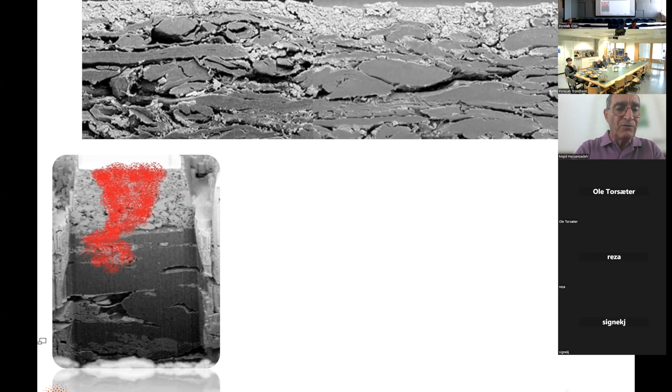Look at this formation cross-section, and you have all these various layers, and penetration of a liquid into that layer. If you can model this, you are actually going to model flow of ink into paper, because this image is not from a geological formation. This is actually from a piece of paper. The image shown on the left is penetration of a dyed ink into paper. So you see that there is a close link between geological porous media and industrial porous media.

So that's what I would like to talk about. I will give some more examples of industrial porous media, talk about similarities and differences with geological media, and what is specific about industrial media. The limitations of traditional modeling mean we cannot really use exactly the same models as in geological porous media for industrial applications, or even the experimental methods - they will need some modification, refinement. So I'll talk about that as well.

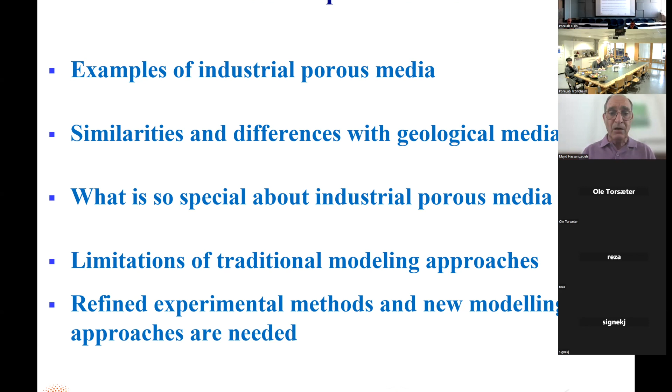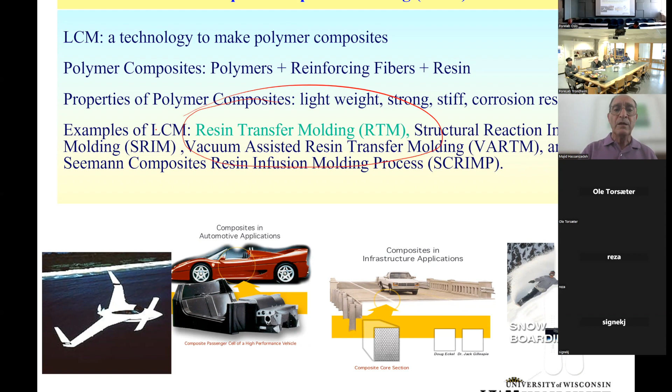One example of industrial porous media is a liquid composite molding system. This is to make composites that are all around us. In the lower part of this slide, you see many examples of things made from composites. There are various ways to make composites. One of them is resin molding, resin transfer molding. Very simply illustrated, it is as follows.

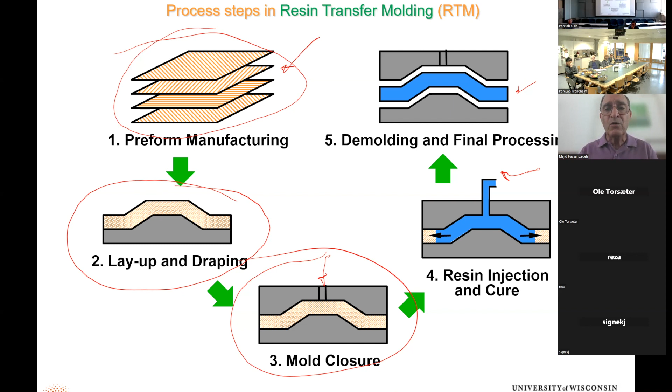You have certain mats - these are synthetic material - and you put them in a form to give them a desired shape, and they close the form. There is an opening where you can inject a liquid resin, and that penetrates the layers of porous material. Once it fills, let it dry, it will cure and harden, becomes the solid composite material you want. Now, this is basically flow of liquid into a dry porous medium, just as happens when dry soil is invaded by water. It's a little more complex because of these layers, and also because there would be heat generation, so you need to look at not only moisture transport, but heat transport.

And this is actually true in many other porous media - you have complex, coupled processes. For example, fuel cells. I guess nowadays everyone knows about fuel cells.

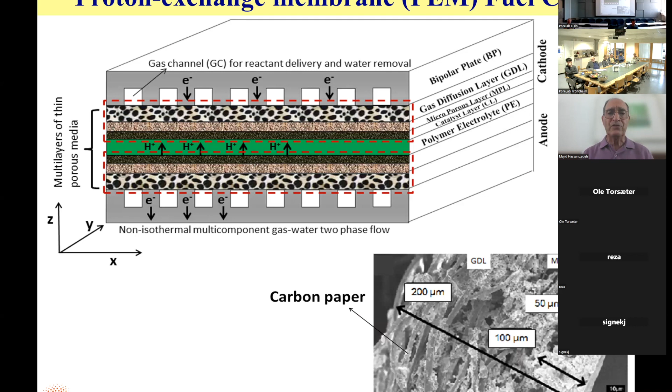As you know, air and hydrogen react, produce energy, but also they produce water, which is the waste. Some parts of this fuel cell must remain moist, but you don't want too much water. So water management is a major issue. You need to know a lot about these porous materials and the modeling and so forth.

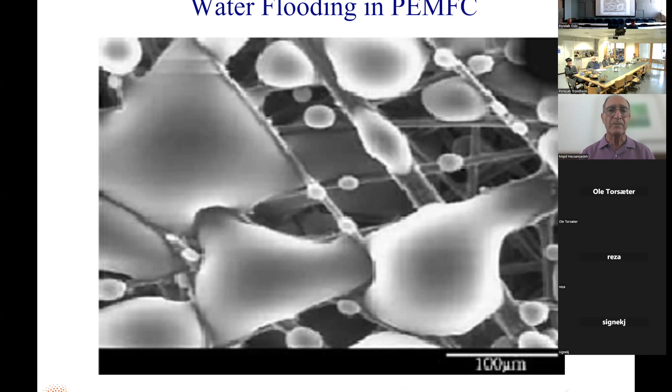In paper production, there are very interesting examples of unsaturated flow in porous media. They make paper from paper pulp, which is basically water with a little bit of solid in it, less than 1% solid weight. This must be turned around so we get paper that's more than 99% solid, with maybe some moisture of less than 1%, because you always have moisture in solids.

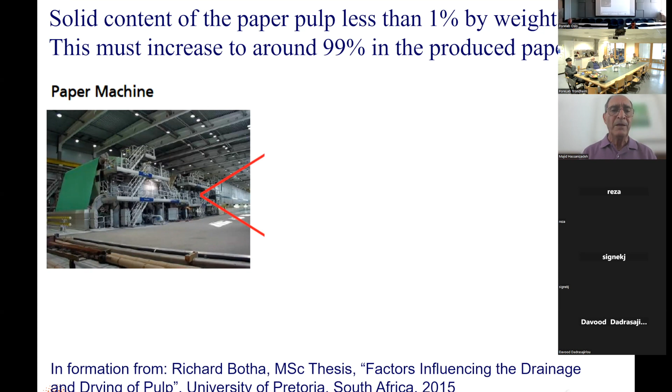This is done in a paper factory, a paper machine, and there are 5 main parts to a paper machine. There is where you make the pulp. Low consistency means it's very, very little solid.

This pulp is taken to a forming section where as much water as possible is removed from it by gravity drainage and by vacuum. That is done in the forming section. A large part of water, something like 75%, can be removed here, but there's still a lot left.

At the end, the paper will be dried completely by drying, and that happens in the drying section. But drying requires a lot of energy, so you want to remove water more than just gravity allows, and that will happen in the pressing section.

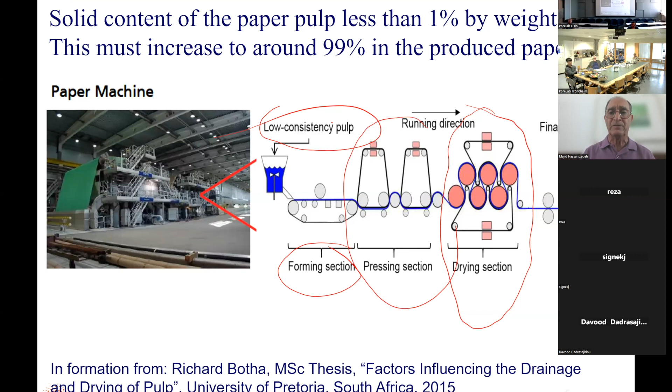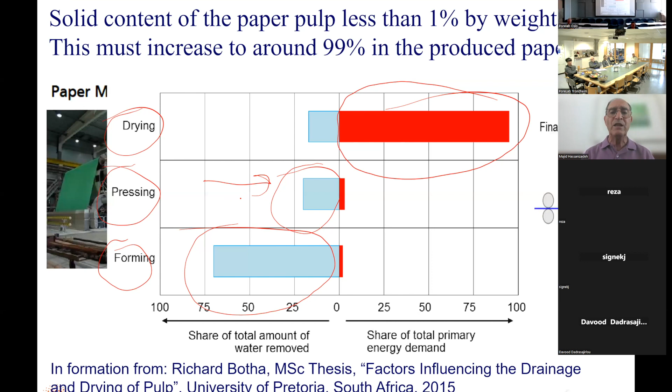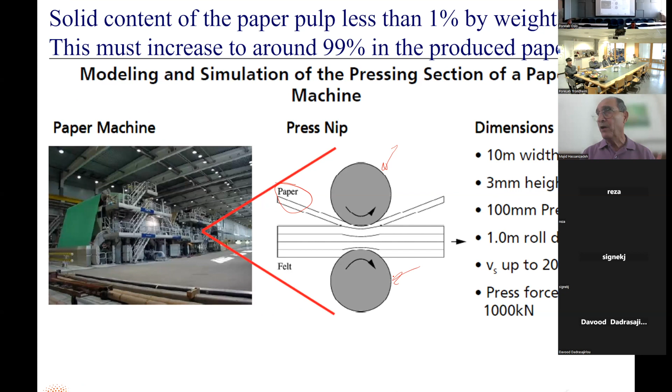This is done in the pressing section by moving the paper pulp, shown here, between two presses, two cylinders. The paper pulp that by now has about 75% water by weight is put on a felt.

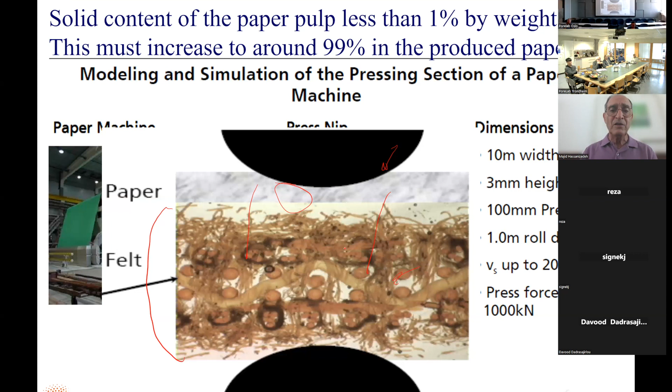This is a piece of clothy material, which is extremely hydrophilic and very dry. By pressing this paper pulp, the moisture is basically pushed and sucked into this felt. That reduces the amount of water to less than 10% by weight, which then has to be removed the rest by drying. So this is another example of unsaturated flow.

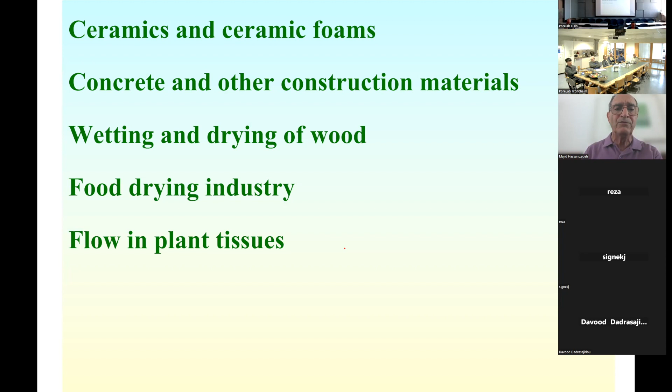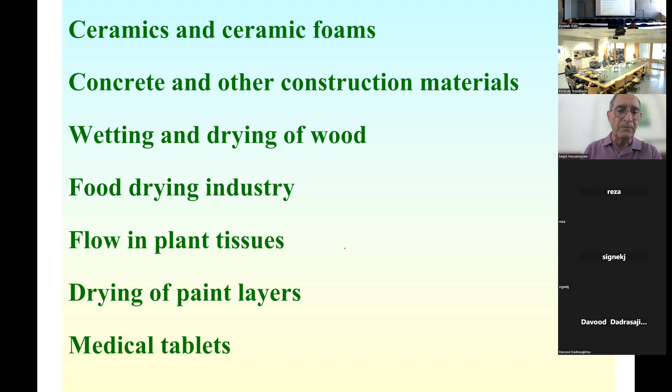There are many examples in ceramics making, construction material, drying and wetting of food, in wood, in food industry, in plant tissues, drying of paint layers, in textile making dresses, and also medical tablets, metal foam.

It just goes on. I would like to give you two more interesting examples, things that we have worked on. One is that study of inkjet printing.

How does ink penetrate into paper during inkjet printing? This is very important in the sense of optimizing the composition of the ink, the attachment to the paper, and reducing the amount of ink and so forth.

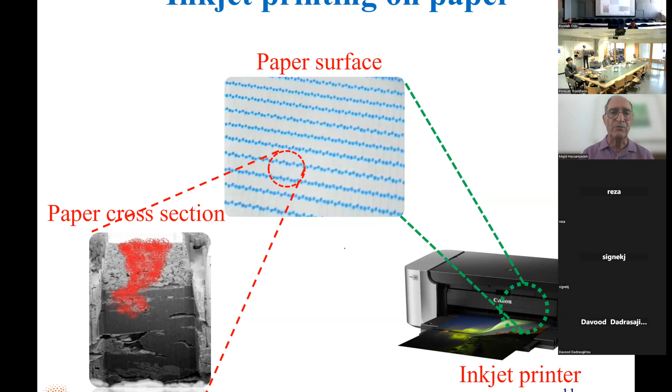So the ink, both paper and ink are complex materials. We have studied the paper. The coated paper has a coating layer and a base layer.

In this example, the base layer is 85 micron thick, but it could be up to a couple hundred micron, and the coating layer is typically 15 to 20 micron thick. There is, of course, coating on the other side as well.

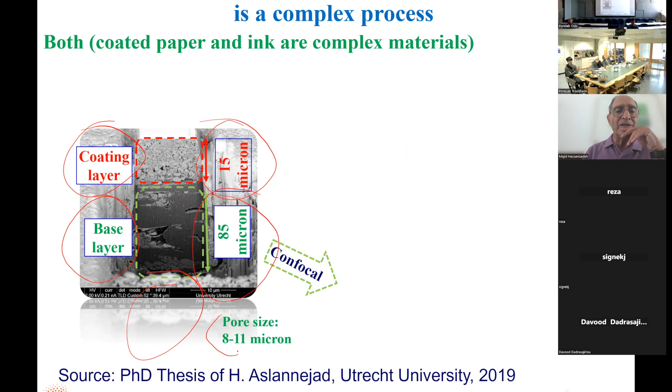This base layer is a fibrous material. It has pore sizes of 8 to 11 micron, and we can therefore use confocal laser microscopy to image that layer. You can also use CT scanning to image it.

Here you see images from confocal laser that we have prepared ourselves. You can see the fibers very nicely, very clearly, their surfaces. And we can also see penetration of ink that has some fluorescent material in it into that paper.

The coating layer, however, has very tiny pore sizes, 100 to 600 nanometer. So we cannot use confocal laser microscopy.

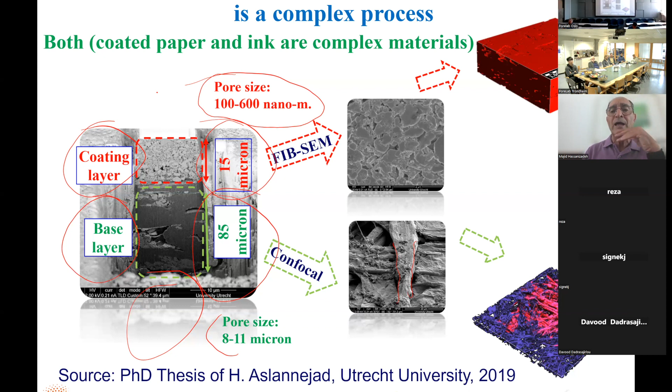Instead, we need to use something like FIB-SEM, focused ion beam combined with scanning electron microscopy. This gives a three-dimensional image of the structure of this coating layer, which we can convert into a digital image for pore-scale modeling. The penetration of a liquid's movement into that fibrous material is very complex.

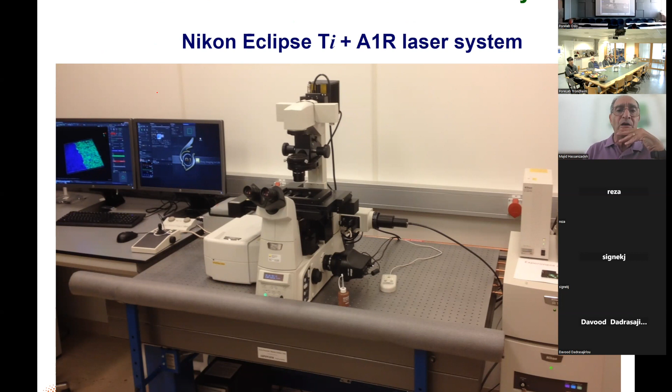Here is a Nikon microscope we have used for imaging, getting images like this. What you see are the green fibers of the fibrous layer, and then we are introducing some fluorescent dye from the right-hand side.

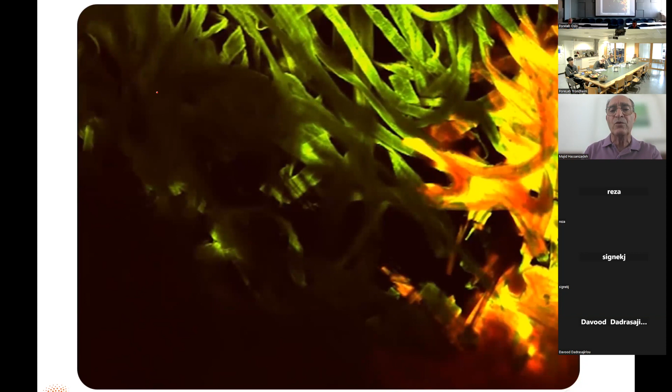What you see is that there are two fronts. The redder the color, the higher the moisture. You can see that the fibers become red, and the space between fibers becomes more saturated afterwards. So it's a sort of two-domain invasion of this ink into the fiber. You can see that here very clearly — there are really two different fronts.

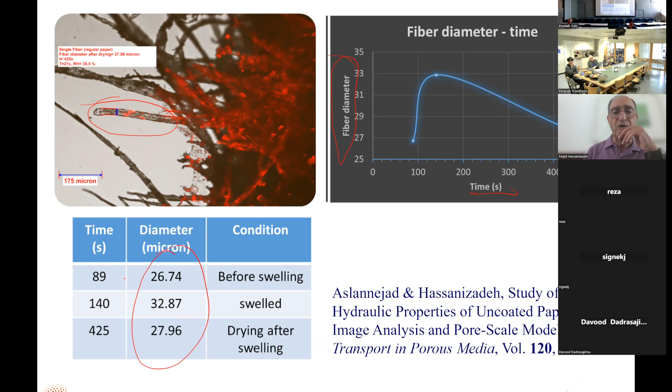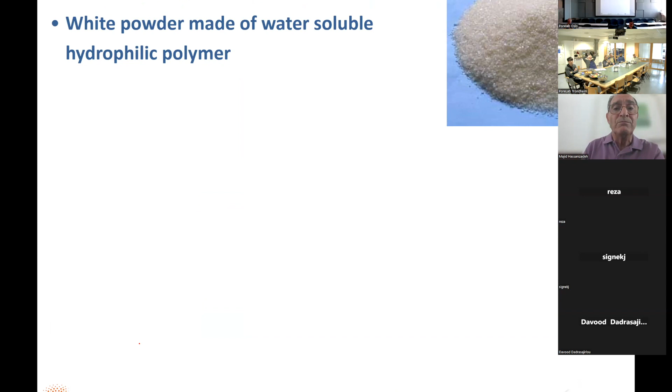Water goes in there in huge amounts — a gram of SAP can absorb up to 1,000 grams of distilled water. Of course, if there are solutes in there, less will be absorbed, and in the case of urine, 1 gram can absorb about 30 grams.

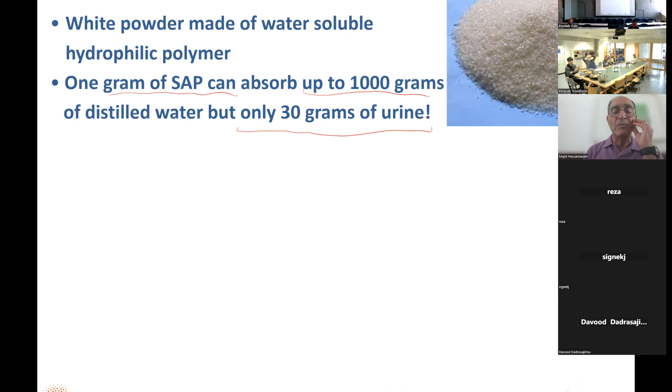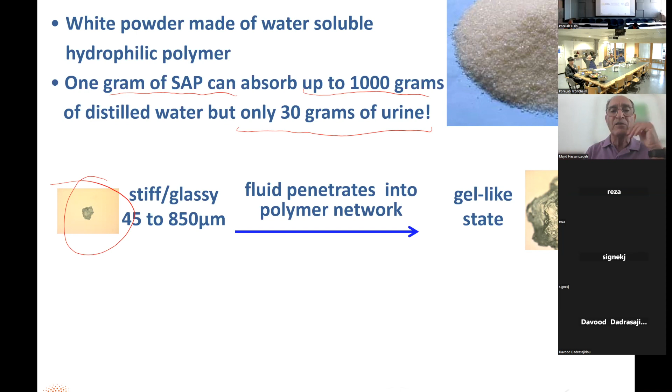These are glassy, stiff particles, a few hundred microns in size. As the fluid enters, it becomes gel-like — basically mostly water once it absorbs so much, but it still holds the shape of a solid material. You see that absorption of water happening here.

We started with particles under the microscope, and this is real time. See, the absorbed water becomes basically transparent.

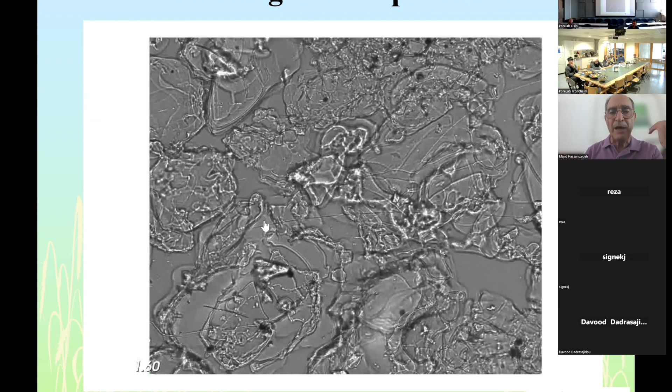You can see that also here — a nice experiment where we have a layer of particles, and you see that happens fast. As the particles absorb water, they grow and fill up the glass, and because they are pushing against each other, they won't come out. We did a similar experiment.

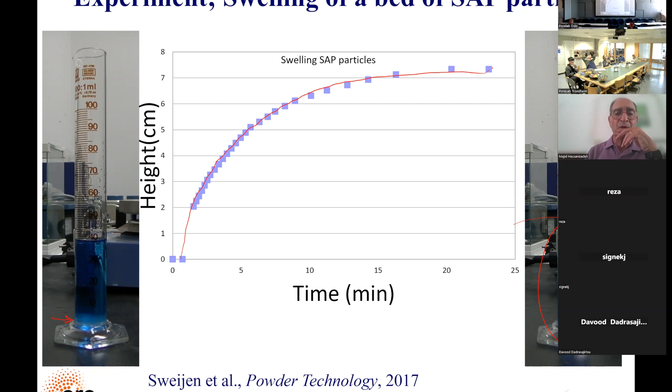Using a camera, we looked at the rise of the surface of those particles, and you see that plotted here as a function of time. We were then able to simulate this process with the discrete element method, shown here.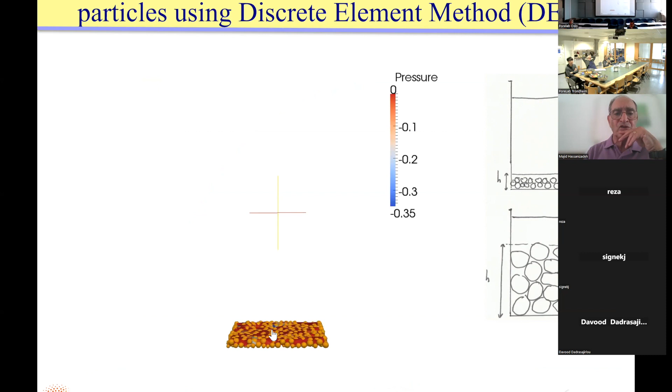The particles are growing — water is basically up to here, so it's growing into the water. What's interesting, you see — let me stop it — yeah, you see that red indicates higher pressure than blue.

What you see here is that the pressure, instead of being higher at the bottom, is lower at the bottom and higher in the upper area, because the suction of water by these particles creates a suction effect and moves water down into that bed of particles.

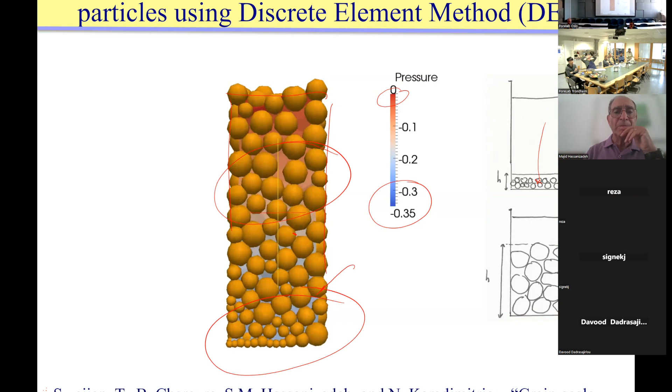So this was all modeled and simulated, and we compared our simulations with the measurements I showed you. The dots are the height of the rising particles as measured, and the simulation is the line, which is reasonably good — there are ways to improve that as well, actually.

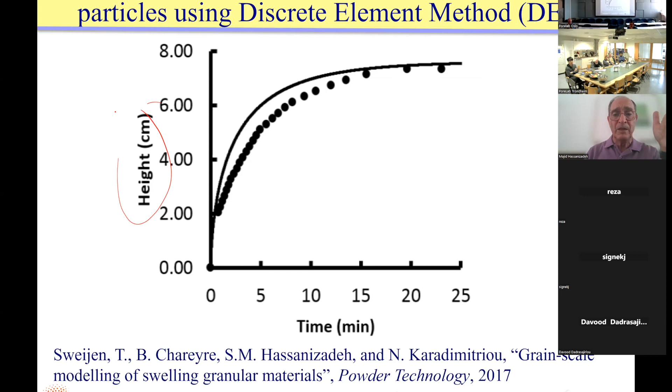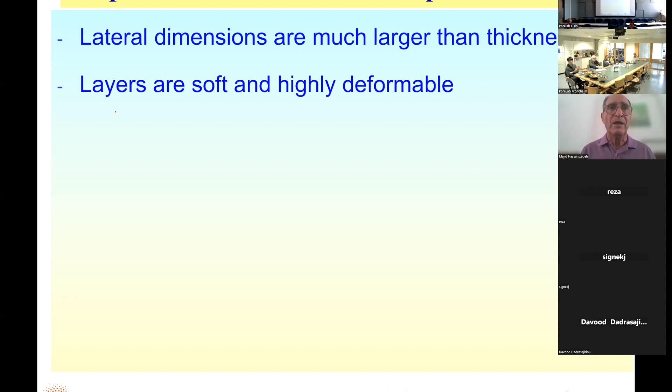So what are the special features of this industrial porous media? One of the main features in most of them, not all, but most, is that they are thin. The lateral dimension is much larger. They are often soft and highly deformable, have high porosity. Take a tissue, for example, has a porosity of 90% and is deformable. The paper is deformable too, and so characterizing it is not straightforward.

There are experimental artifacts. We always have experimental artifacts when measuring volumes or pressures, but these are often negligible in soil samples, but not in this media because you are dealing with small amounts. And so that makes determination of intrinsic permeability and capillary pressure saturation curves difficult with the standard setup.

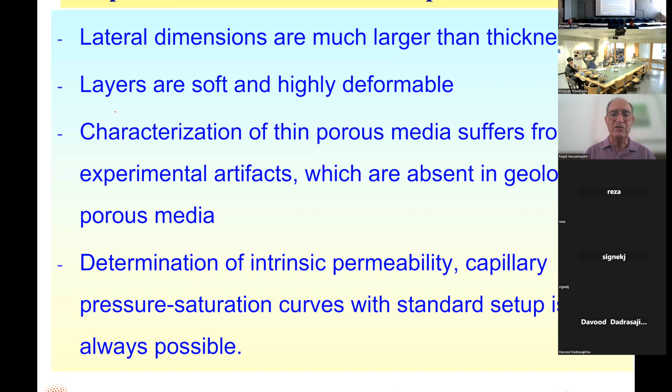For example, we wanted to measure the in-plane permeability, intrinsic permeability of a sheet. Now, you cannot just use a standard permeability measurement setup. For through permeability, perpendicular is not much of a problem, you can use many layers. But for in-plane permeability, you cannot put more layers on top of each other because then there is space between them. So we wanted to have one thin layer of a few hundred microns.

So we made a setup using a 3D printer where we basically created a very small indentation into a sheet of plastic. This is the top view, and we could put our sample in there. Then we were injecting water, and also did it with gas, and measured the inflow pressure and outflow pressure. These are small pressure differences. Then we measured the amount of liquid fluid that would go through, and therefore we're able to measure permeability.

But as I said, we deal with small volumes and small pressure differences, so you really need very accurate measurements.

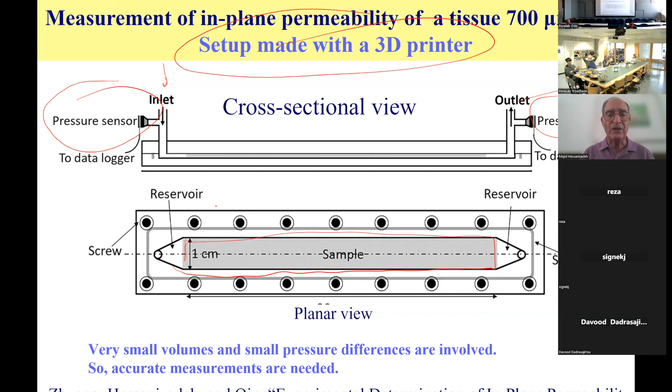This is a standard way of measuring capillary pressure saturation curves for a sheet. So the sheet is put here. This is a standard pressure cell apparatus, also used for soils. There is a membrane here that is very hydrophilic and doesn't let gas go through. And here we have a reservoir of water that always remains full with water, with no gas going in there.

A balance measures the change of weight of water in here, and that corresponds to the weight of water change in the membrane, in the sample. We put a weight there, about 14 PSI, to mimic a baby sitting on the sheet. And then you can do drainage and measurement.

So for example, if you want to do drainage, you start with a dry sheet and let it fill up with water, then increase the gas pressure to eject that water from the sample. You can also do imbibition, where you have very high gas pressure, put the dry sheet there, and then decrease the gas pressure slowly to let the water come in. You can do that in steps and measure the capillary pressure saturation curves.

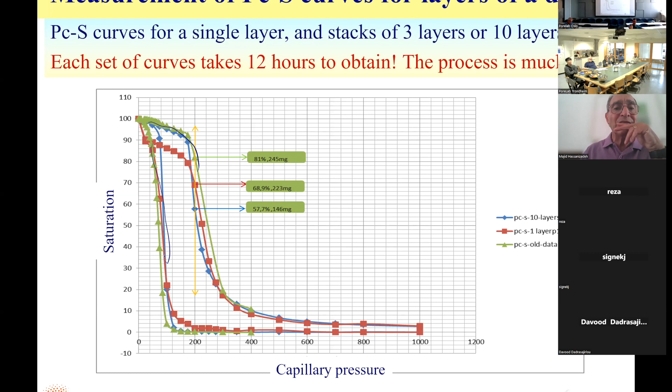By the way, sorry, this was not paper, this was a layer of diaper. And you can do it with 1 layer, 3 layers, or 10 layers. So here we compare 1 layer and 10 layers, and we see that when we had not really modified our setup, we got different results, shown in green, than when we did the modified results. Then 1 layer and 10 layer gave us the same curves - you can see that here, but the green is slightly different. One interesting thing about this data is that each curve for drainage and imbibition takes 12 hours.

So you get a curve that gives you a relationship between PC and saturation, but that relationship is developed over 12 hours. It has to be done very slowly. Whereas the process in a diaper happens in 10 seconds or 30 seconds, going from dry to wet. So the process is much faster. And the question is, if the process of wetting is much faster, can you really use these curves, or do you have to do something else?

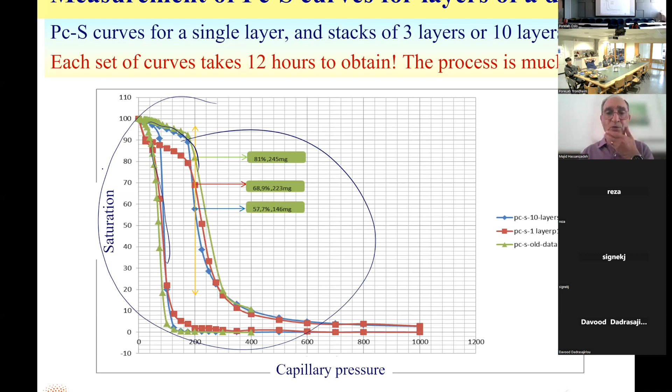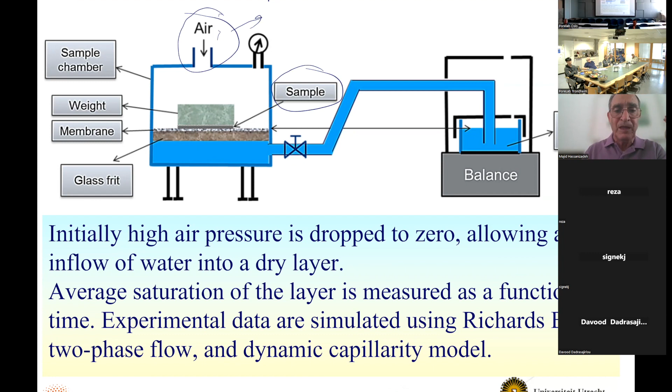So we did that experiment in the same setup. We can start with a dry sample and a very high air pressure, then reduce the air pressure. If you do it in small increments, you get the typical capillary pressure saturation curves. But in one experiment, we decreased the air pressure drastically so that the layer could get wet in a very short time, as happens in practice. The data are like this, the green curve. As you can see, in a very short time it goes to some large value and then almost a flat plateau.

So now you should be able to simulate this. You can simulate it with Richard's model, having only unsaturated flow. But you can also say, the air is under pressure, therefore it takes time. We know how long it takes for reducing the air pressure, because it doesn't happen in zero time, to some very low value. It takes some time, so we include that, and we do a 2-phase flow model. Both of them really give you the same data, the same curve, and it's different from the measured data.

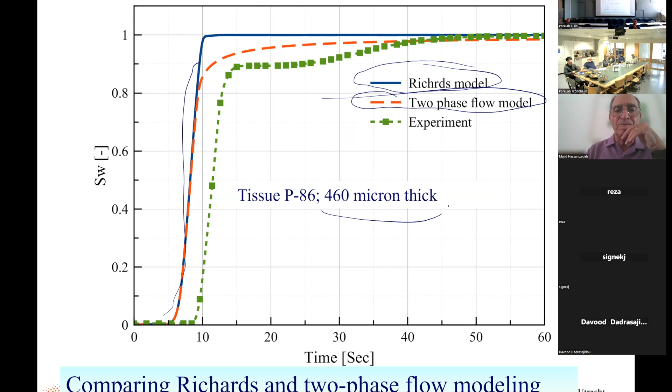This was one type of tissue, and then we did it with two other types of tissues. They were a little thinner. Again, the symbols are the measurements and the curves are the simulations. We don't get a really nice fit.

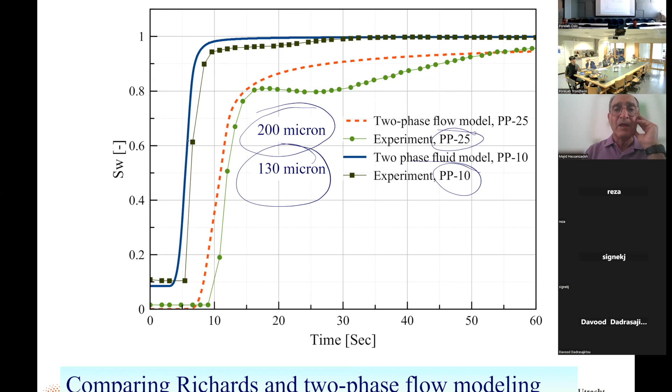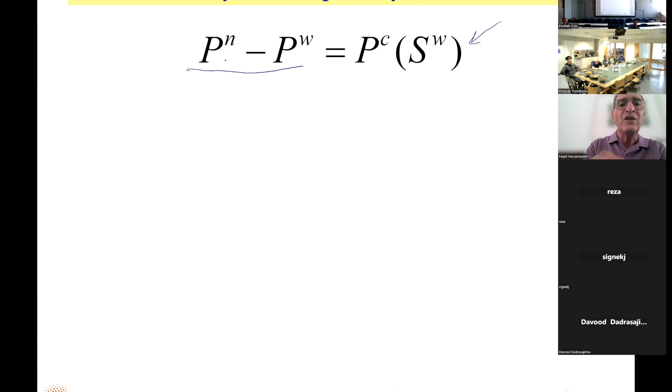So here we believe the dynamic capillarity effect is important, because in those theories, Richard's model, standard 2-phase flow, it's assumed that the non-wetting phase pressure and wetting phase pressure are in equilibrium with the saturation that is there. Whereas in this experiment, the air pressure is decreased very fast, whereas the water pressure doesn't change as fast, so it's not able to follow this relationship.

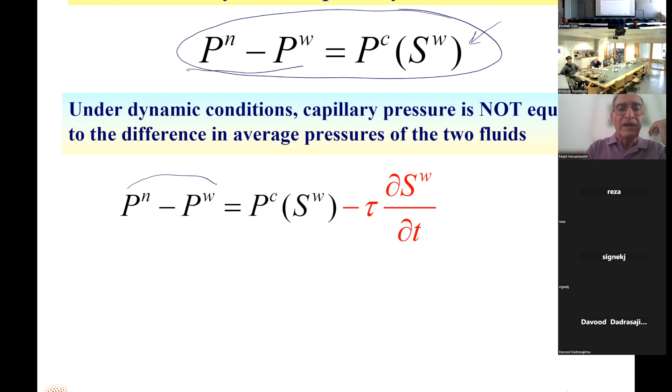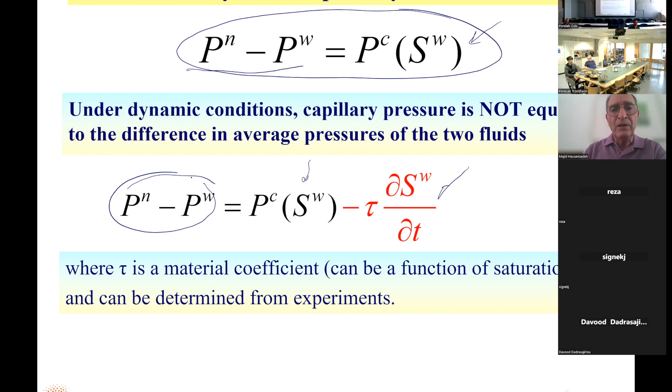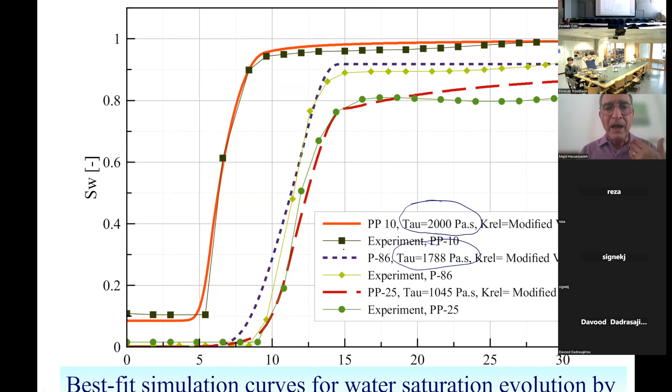So this is one of the things that differs from a lot of geological porous media. Processes often happen fast. In the pressing of paper pulp I mentioned to you, it moves through the paper pulp, and the felt moves between presses at tens of meters per second, fast. So the imbibition really happens really fast. Whereas for that felt, if you measure the PC-S curve, you need a day to get the curve for that felt. So processes happen fast, therefore the dynamic effect is often important.

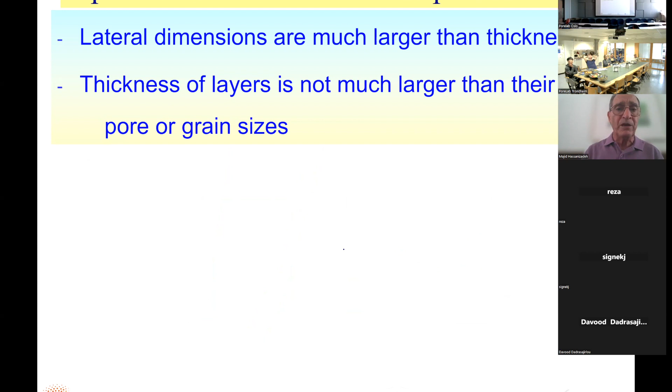Now, another aspect is that, as I said, the lateral dimensions are much bigger. You have a thin porous medium. For example, here you see that the size of this layer is 150 micron, and the fibers are 10 to 20 micron. They are not much smaller than the thickness. So the question is, can you really treat this as a continuum and use macro scale models to model flow through this by discretizing this layer?

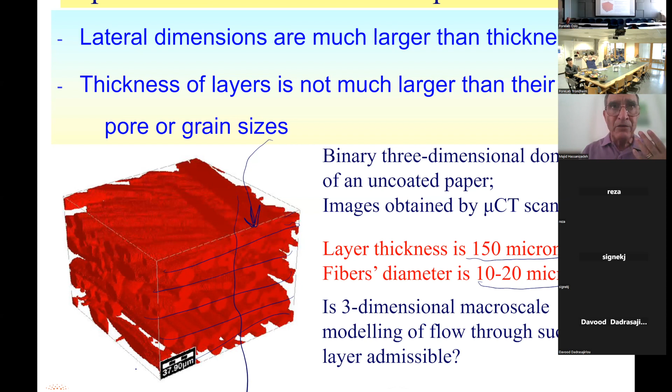The answer, in my view, is that it's not really admissible based on principles of macroscopization. When you use macro scale models, you use average quantities, averaged over a representative elementary volume, an REV. There are requirements for this REV: its size must be much larger than the pore sizes or grain sizes, and much smaller than the domain size.

Now, what I showed you was from a paper. We did the measurement of porosity for different REV sizes. We took the whole thickness of the paper, and you see that even when you take the whole thickness, in the lateral direction you need 200 micron, or actually 400 micron, before it reaches a plateau. This means that macro scale theories are not valid in this range of REV sizes. And in the paper I just showed you, the REV size is equal to the thickness of the paper.

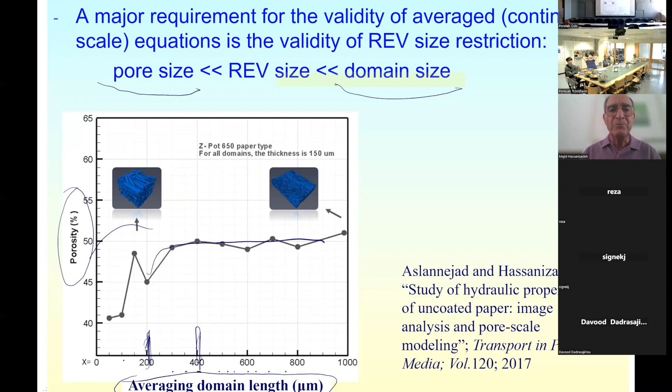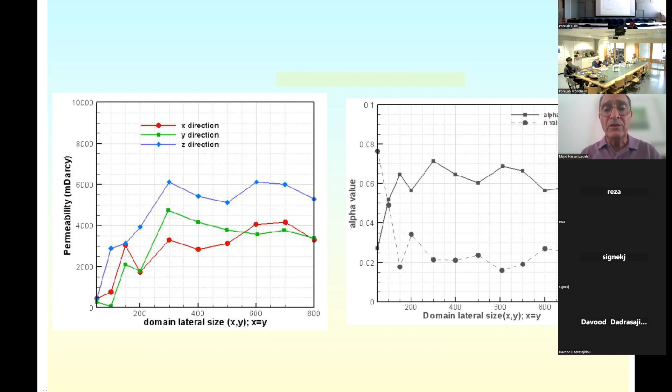So you really cannot say I have many REVs over the thickness of paper. We cannot fulfill the restriction that is here. So here I also show you that basically the main message is that the REV size is comparable to the domain size, not much larger than the pore sizes. And here you see permeability as a function of the domain lateral size. Again, you need an REV size that is comparable. And by the way, on the right-hand side, we see van Genuchten parameters, and we see that we need the same sort of REV.

So if the REV size cannot be defined, can we use macroscale theories? Another issue is that often we have a stack of thin porous material stacked on top of each other. Now, a thin porous media is one piece of porous material, but the space between two layers, it's not really a porous medium, it's a space. How do you model that?

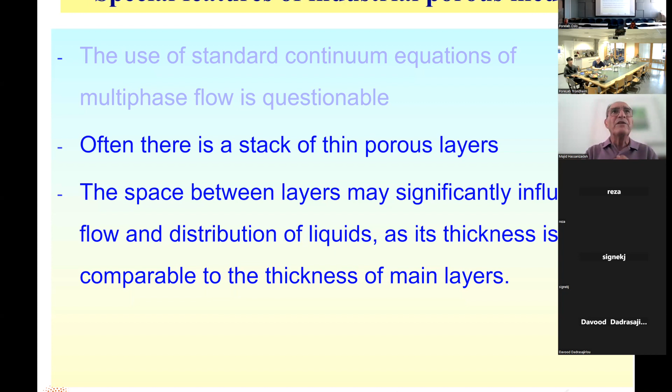If you do 3D modeling, you can discretize the layer and then apply Darcy's law there, but what do you do with the space between it? How do you discretize that or model it? And that space is really important, really affecting the process.

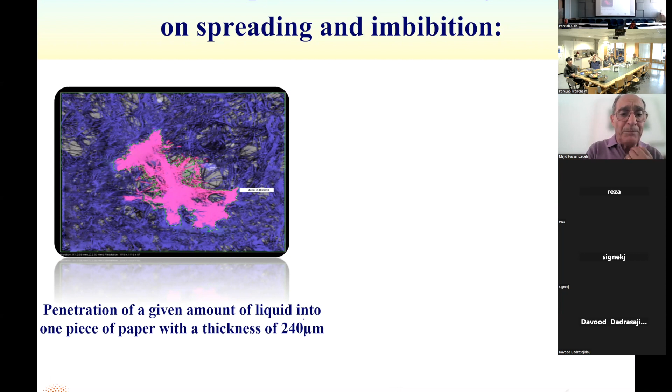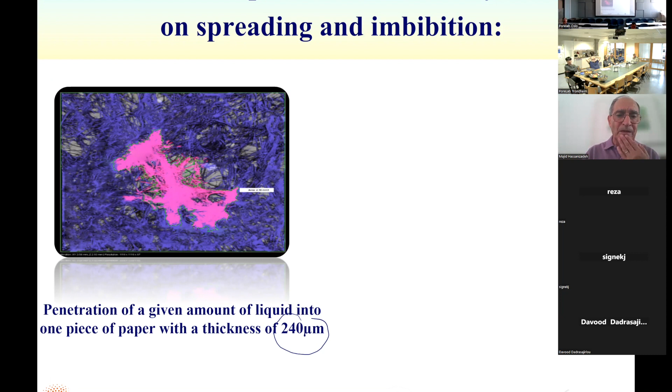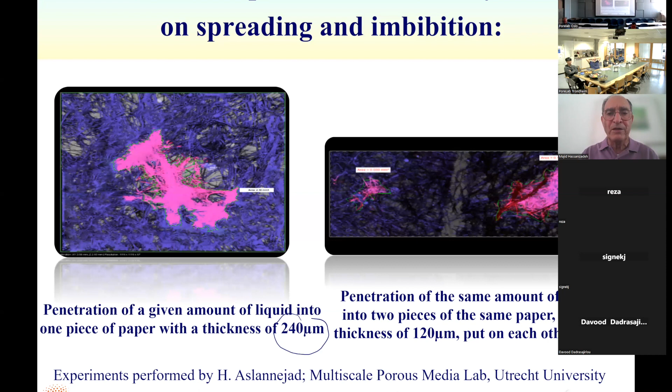This is because there is a space between them. So that really affects it.

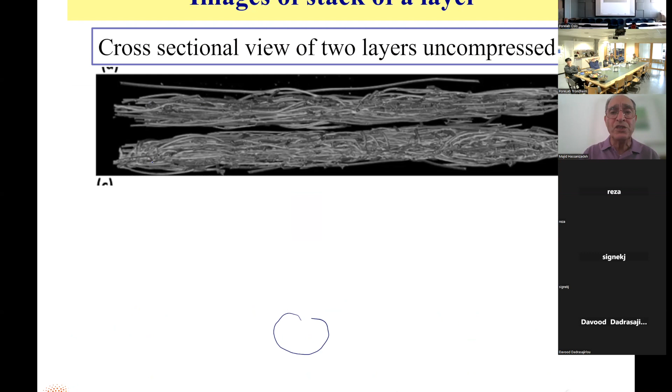So the question is, how do you model that? One way to model such a layer where the REV cannot be defined is to do pore scale modeling. The advantage of these industrial porous media is often that they are sizes you can hold in your hand - you can put them under a microscope. It's not like geological formations where you can only put a borehole in there or take a sample out and study it and make conclusions about the whole reservoir. Here, you have everything in your hands and you can image the whole thing, so you have the whole pore space - therefore, why not do pore scale modeling?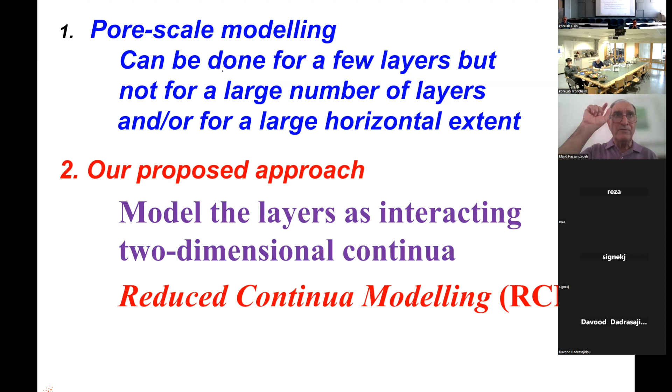For that, instead of the traditional three-dimensional porous media approach, which requires being able to define an REV over the thickness as well, we use what we call a reduced continuum model. In the reduced continuum model, we basically do REV averaging, but then the REV size is equal to the size of the layer.

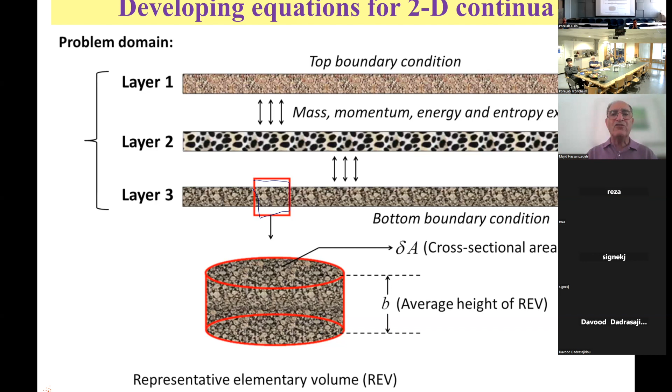So we don't have REV moving over the thickness. There's one REV over the thickness, and then of course, many REVs laterally, which means that when you do the averaging, you don't get three-dimensional equations, you only get two-dimensional equations. But you get one set of equations for layer 1, two-dimensional, one set of equations for layer 2, one set of equations for layer 3.

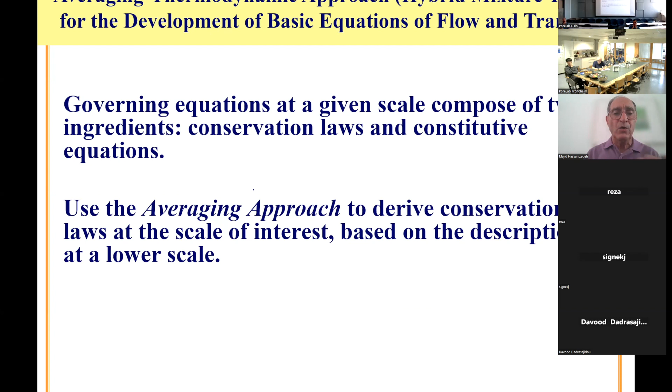This means that we derive equations of conservation first, then we use rational thermodynamics in order to obtain constitutive equations. I'm not going to go through that, but the three layers, which are very thin layers with some thickness, are modeled at the macro scale as zero thickness domains. So they are zero thickness and only have an order with respect to each other: one is on top, one is in the middle, one is at bottom, and they exchange with each other.

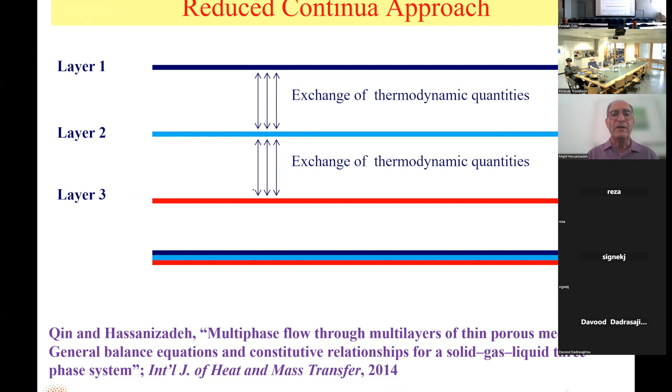Thermodynamic quantities. So this means that we have one equation for each layer, and that's the equation here, one equation for the top layer. In this case, this is the continuity equation. Change of saturation as a function of time is as a result of lateral fluxes. So the fluxes are lateral, but then there is exchange of mass between upper layer and lower layer.

That's this one. As you can see, it's negative here. And then there is from top, something comes into the upper layer, and at bottom, something leaves the lower layer. So those are the governing equations. As you see, there is no gradient in the z direction anymore, only in the x and y direction.

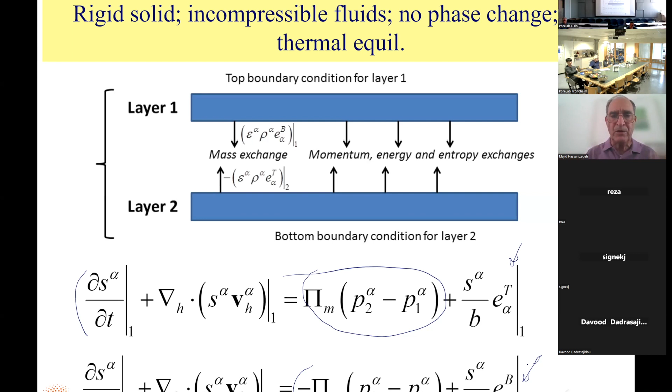This is very nice because the properties you need are all average properties, averaged over the thickness of the layer. We don't need to give properties as a function of thickness, for example, the depth in the z direction. So there was an experiment that we did.

I'm going to finish in 5 minutes. This was done at Procter & Gamble research site near Frankfurt, where we put two layers. You see those are the two gray layers on top of each other, but the upper layer is completely wet. And then we put them on top of this instrument called NMR mouse, nuclear magnetic resonance measurement, that can measure the average saturation of each layer.

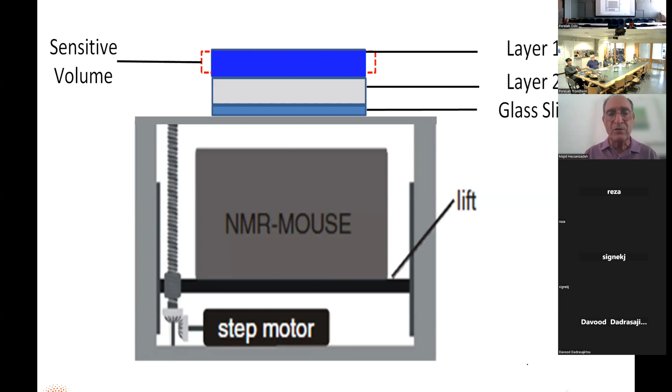So it measures it really over the whole layer. We don't get distribution as a function of X, Y, or Z. So for each layer, we just get one average saturation. Now, the layers being reasonably homogeneous, we say, okay, that's fine, we can use that as our data.

So we get that here. The blue is the top layer. You see that it's a saturation. By the way, I didn't say it completely correctly. The top layer is not completely moist when we put it there. No, we rain water on the top layer.

Okay, so as you see, the saturation of the top layer increases as we rain water on top of it, and it reaches a plateau at some point, and then we stop raining, and the lower layer starts receiving water after some time. It takes time for it to receive water. It doesn't react immediately. It eventually reaches the same saturation as the upper layer, but it takes time, it's delayed.

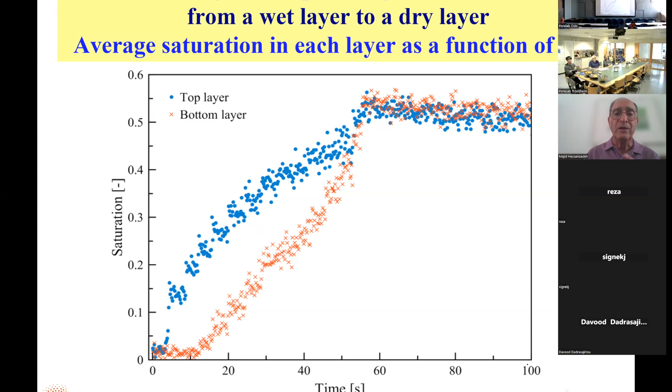We were able to get the porosity as a function of depth because we did the imaging, and we defined 14 sublayers for each layer for our modeling with Richards' equation. We really put in the real value of porosity. We also constructed PC-S curves for those sublayers. So we broke it into 14 sublayers. We did this really...

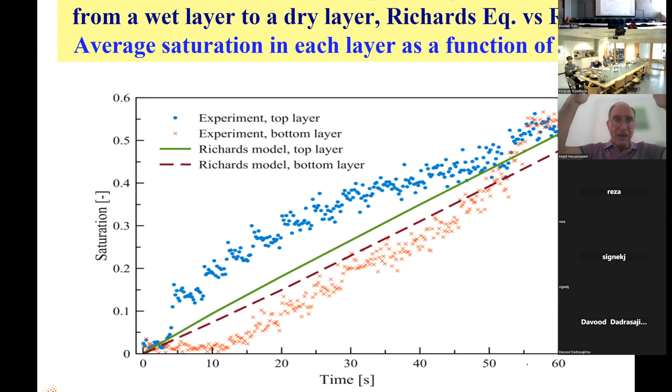That was our numerical grid as well, and we didn't get any fit. Whereas when we use our equations, you get a very nice fit.

I must say we fitted the value of this exchange coefficient. By the way, this exchange coefficient is a property of the space between the two layers, because it tells you that the pressure difference between the two layers is the driving force for exchange of water, and then there is a transfer coefficient, a mass transfer coefficient, which is a property of the thickness, the space between them. If you push the two layers together, that coefficient will increase. And if they are not pushed against each other, the space is bigger, the coefficient will become smaller.

So I think I'm going to end here. I'm sorry about the issues with the presentation. I'll let you read the conclusion, as time has passed, and I hope we have time for questions.